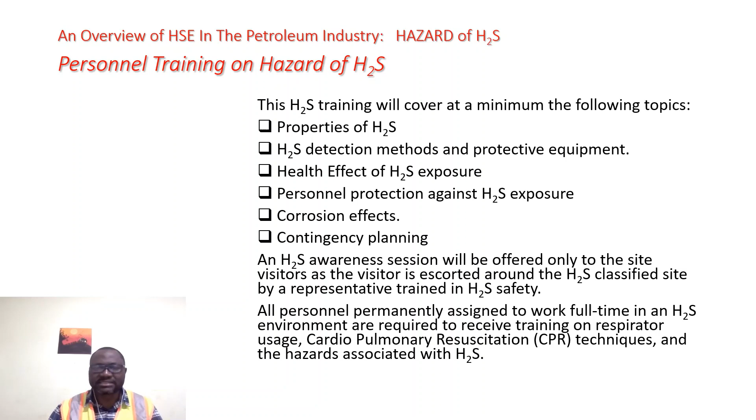Then corrosion effects. And finally, I will talk about the contingency planning and how to rescue somebody that is knocked down by H₂S. That is where I'll be talking about first aid and possibly CPR and things like that. Please come along with me.

So the first thing I will be talking about is HSE management system. What is HSE? HSE is an acronym for Health, Safety and Environment. So when we say HSE management system, it's a comprehensive framework that is used by organizations in preventing, mitigating and eliminating disruptions and losses caused by workplace accidents, risk and hazard exposures, and environmental phenomena.

Further to this, an HSE management system is also key to monitoring an organization's compliance with relevant laws and standards. Okay, there are three keywords in what I just said which will shed more light and bring better understanding to what we are talking about regarding the HSE management system. The first one is accidents. The second one is risk, and the last but not the least is hazard.

So I will explain in detail what these keywords mean, and this will give better understanding to what we are driving at when we say HSE management system. Okay, there is another keyword, we call it near miss. I will explain that one also briefly. So please come along with me.

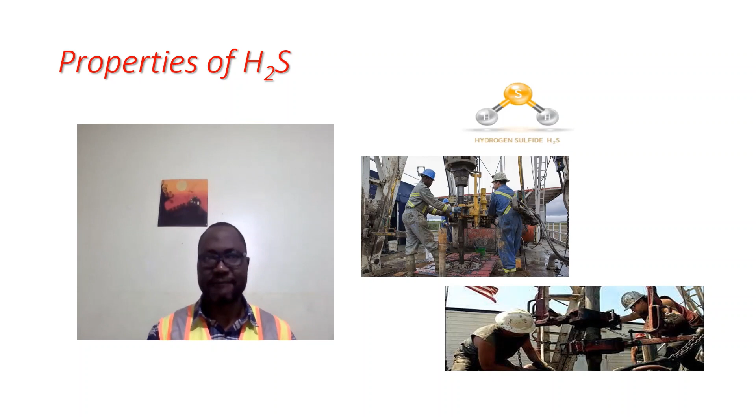Concentration of H₂S will be different at different locations. The toxic effects of a particular H₂S concentration may yield variable responses depending on the duration of exposure, level of concentration, the physical condition of the subject, and the frequency of exposure. So this that I just said in summary signifies the importance of the properties of H₂S. Like I said, in low concentration, it has a characteristic odor of rotten eggs.

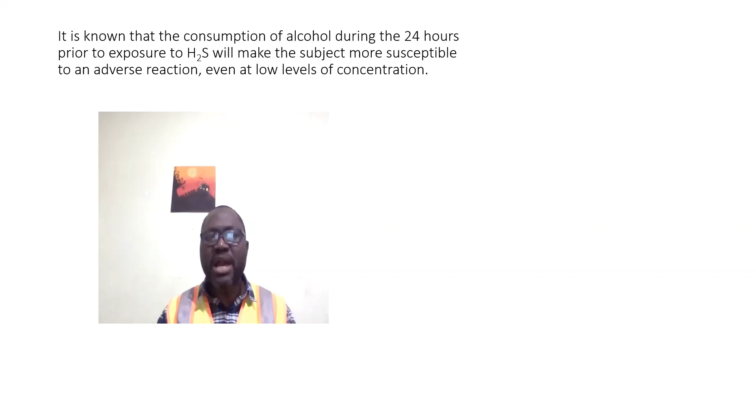In concentrations over 100 ppm, that is 100 parts per million, the human sense of smell is quickly paralyzed. So you cannot smell the H₂S again when the concentration becomes above 100 ppm. Therefore, the sense of smell cannot be relied upon to detect H₂S, and the wearing or availability of respiratory protection is extremely important.

So at this concentration, it is very, very mandatory that any personnel that is going to work in an H₂S detected area must wear respiratory protection.

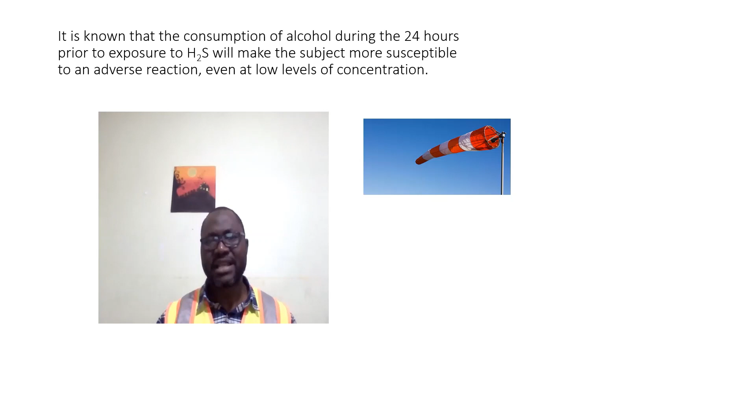So H₂S, because it is heavier than air, tends to go down. It can also be found in low-lying areas. So that is why whenever H₂S is released or there is an alarm that there is H₂S released somewhere, the personnel are required to go upwind. I'm going to talk about the wind socks to detect the direction of the wind. So once you know the direction of the wind and there's a release of H₂S, then you go upwind.

Since we've got to know through the properties of H₂S that it is colorless, it is odorless, and it is heavier than air, how do we now detect if there is H₂S? So what are the detection methods? We cannot detect by sense of smell, it's not reliable. Although at low concentration, you can smell the distinctive rotten egg smell. But when the concentration goes above 100 ppm, as I mentioned earlier on, the sense of smell is deadened, paralyzed. The olfactory lobe is affected, you cannot smell again.

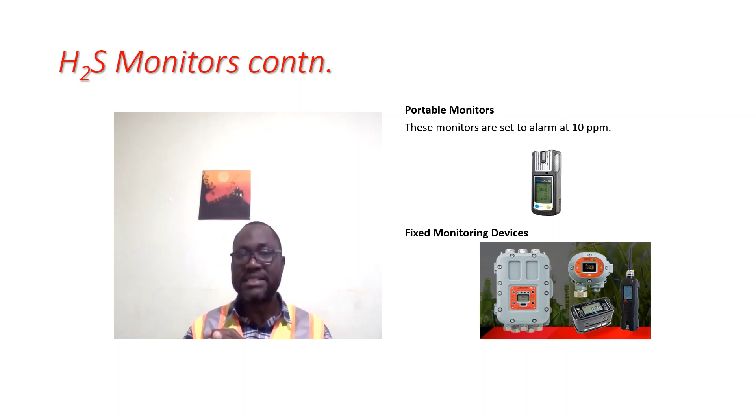So shipping or storage areas should also be considered as release points as well. So you have to put these fixed monitoring devices. You have to install them in all those areas, like where processed gas can be released from a number of different valves, weld joints, seals, flanges, or gaskets.

I've participated in one project before in the Kuwait National Petroleum Corporation, whereby we fixed this type of monitors. And when we were fixing the fixed monitors, we also had our own mobile or portable monitors that are fixed to our breathing zones.

The next thing I will be talking about is the health effects of H₂S. Under the health effects of H₂S, I'll be telling you the concentration in relation to the exposure time and the health effect. So let me start with 0.1 to 10 ppm. When you have 0.1 to 10 ppm of H₂S being released, instantly you will be able to detect the distinct rotten egg odor. The maximum continuous exposure time for 10 ppm is 8 hours. So that is the threshold limit value of H₂S. That is very important to note.

Now, if you have between 100 and 200 ppm, this is divided into two parts. The first part, the exposure time from 2 minutes to 15 minutes. In that period, there will be loss of sense of smell. The olfactory lobe will be attacked and you will not be able to smell anything again. That is why we say that sense of smell is not a good detector of H₂S. You cannot rely on your sense of smell, because if the release continues and you did not go away from that area, that same H₂S is going to attack your olfactory lobe and you will lose your sense of smell. And once you lose it, you might be deceived that the gas is no longer there. It is still there. So when you remain there between 8 to 48 hours, the next effect on your health is death. It's as simple as that.

And if you have between 500 and 600 ppm, exposed within 30 to 60 minutes, the first health effect is on the central nervous system. There will be confusion and loss of balance. The person will feel confused and he will be staggering. He will not have stability; there will be loss of balance, in short.

Then, if you have between 600 to 1,500 ppm, let's say a person is exposed to that amount for 2 to 15 minutes. Apart from the central nervous system being affected, apart from confusion and loss of balance, the H₂S odor can no longer be detected. Then if the person continuously stays there for the next 1 hour, the person is going to die. So rapid loss of consciousness, respiratory paralysis, followed by death. That is when you have between 600 to 1,500 parts per million of H₂S.

Now, let's say in a location we have about 2,000 ppm. What is going to happen? Instantly, immediate loss of consciousness. The person will become unconscious immediately. Then there will be rapid failure in breathing. The person will lose his breathing and heart function, followed by death. So this type of situation we call IDLH, immediately dangerous to life and health. Any situation that is going to lead to immediate fatality, that is how we describe it in the field of safety. And that is the reason why we say H₂S is one of the most dangerous gases in the petroleum industry.

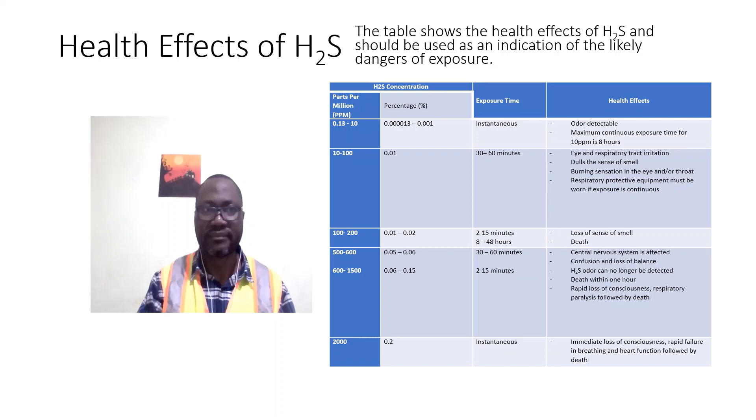After talking about the health effects of exposure to H₂S, next I will be talking about personnel protection against H₂S exposure. So working in an H₂S area, how is the personnel going to be protected against H₂S? The first one is that all workers must receive a site-specific orientation and know what the alarms are and where the evacuation points are located in case of an emergency. So there should be a contingency plan before anybody can work in an area that is suspected to get a release of H₂S.

Secondly, all non-routine work must have a work permit and a pre-job discussion that identifies the risk of H₂S. What do we mean by this? There is something we call the work permit system, whereby before you can work in an area in oil and gas, maybe in the petroleum industry, maybe in a refinery, you must first of all get a work permit. We have different types of work permits. You have cold, hot, confined space, like that. So you must get the appropriate work permit before you can work.

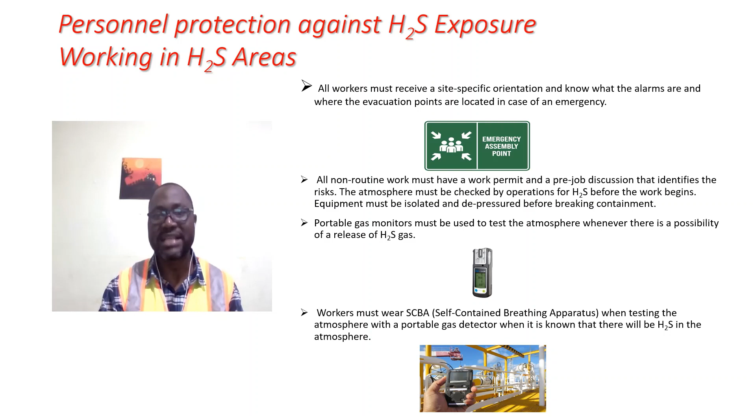The SCBA, I'm still going to talk about it in detail, but the SCBA means the self-contained breathing apparatus. So they have to wear that when testing the atmosphere with a portable gas detector when it is known that there will be H₂S in the atmosphere. And when working in a confined space that contains H₂S, there must always be one more SCBA available than the crew members. So, for example, if you have a 3-man crew, then you will require 4 SCBA.

Then workers must know where to locate the wind socks. The wind sock is what is installed in the area to detect the direction of the wind. Through the wind socks, you can know the direction of the wind. So in case of a release of H₂S, the personnel must move upwind. In the case of an unplanned release of H₂S, the personnel must move upwind. And how would they know? By the wind socks. Some people use sand. They will carry the sand and drop it like that so that they will know the direction.

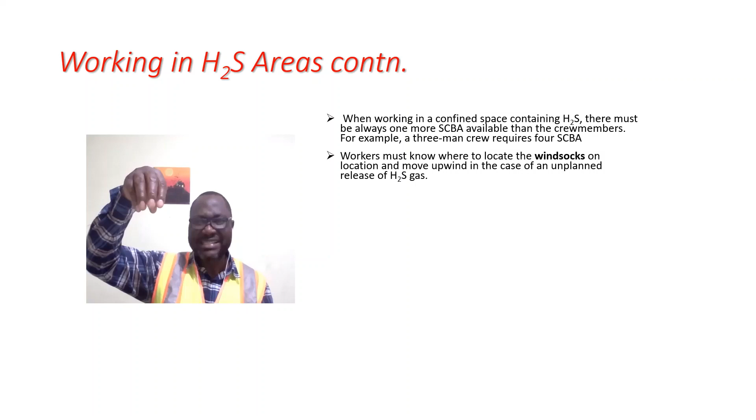But that one is not all that reliable, because suppose the wind is not blowing strongly enough at that moment to blow the sand, but the wind socks can always show you the direction of the wind. So in case of an emergency release, you have to know that you have to move upwind. All operators working in an H₂S area should wear a personal H₂S monitor. Apart from the fixed ones, you must carry your own personal H₂S monitor anytime you are working in an area where there is a likelihood of release of H₂S.

If there is an unplanned release of H₂S into the atmosphere, all workers in the area must do what? They must evacuate without delay. They must evacuate immediately. And when they evacuate, they will go to the evacuation point, or what we call the assembly point. Communication must be made to the control room to sound the alarm. The supervisor of the team must immediately call the control room, then they will sound the alarm so that everybody in that area will move to the evacuation point. And before that time, there must have been drills about how to escape when there is an emergency or unexpected release of H₂S.

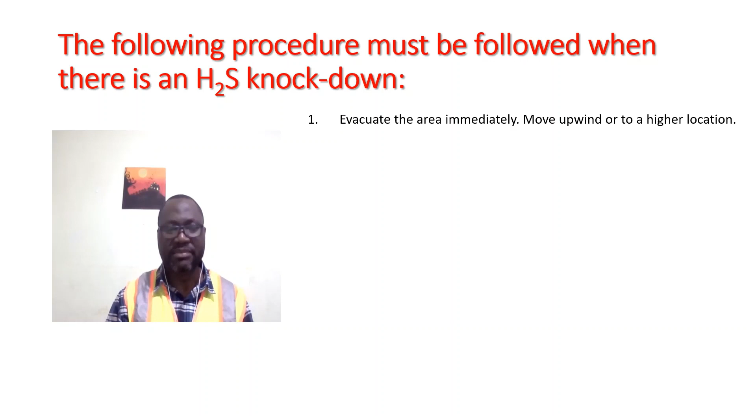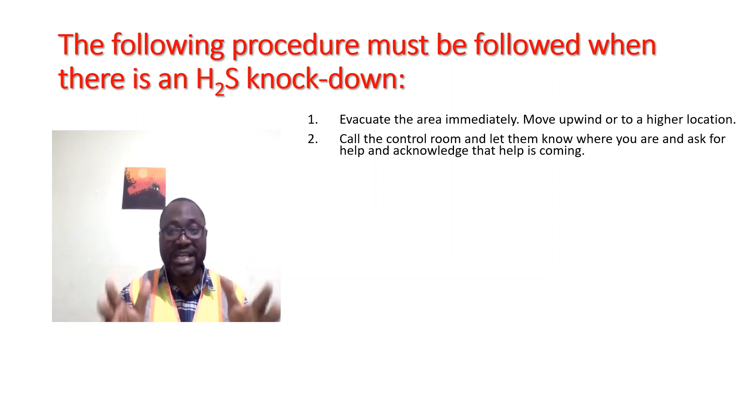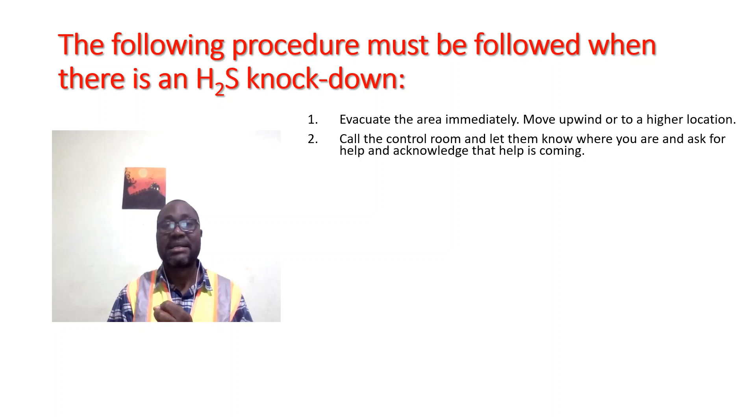The second thing is to call the control room. During the training, everybody that will be working in an area likely to get an H₂S release must have received the training and must have been given the number of the control room to be called, especially the supervisor in charge, and let them know where you are. So you call the control room to inform them of the situation.

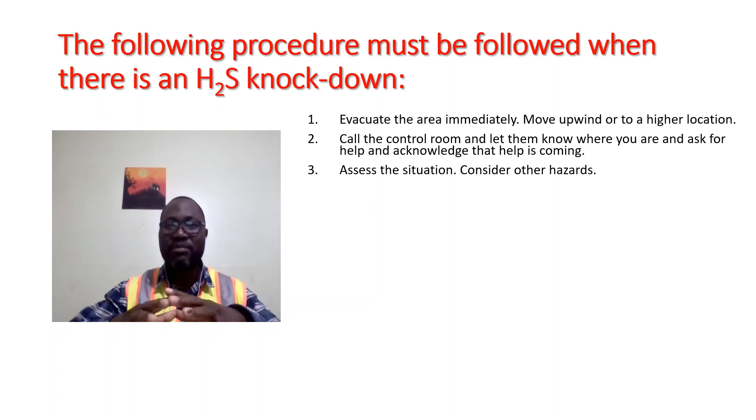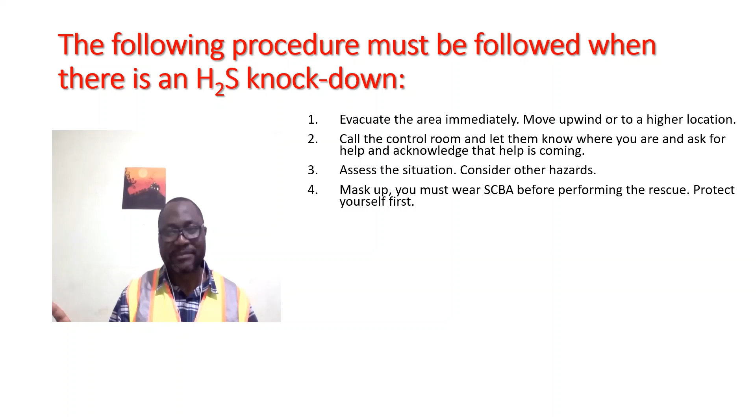Then you have to assess the situation and consider other hazards. Mask up. You must wear the SCBA before performing the rescue. The rescue team will come, so protect yourself first. If you are not trained as a rescuer, if you don't know anything about how to rescue, don't try it. Don't be moved by emotion. Maybe the person that was knocked down is your friend, your brother or your family. Don't try, except if you have been trained as a rescuer and you have a spare SCBA apart from the one you are wearing yourself.

Then you can remove the victim to a safe area, upwind, and with enough room to perform CPR. After moving the victim to the safe area, if the victim is unconscious, you begin artificial respiration on the victim. That is the CPR. Then report and ensure the victim is transported to a medical facility. After you have performed the CPR and the person has regained consciousness, move such person immediately to a medical facility for further medical attention.

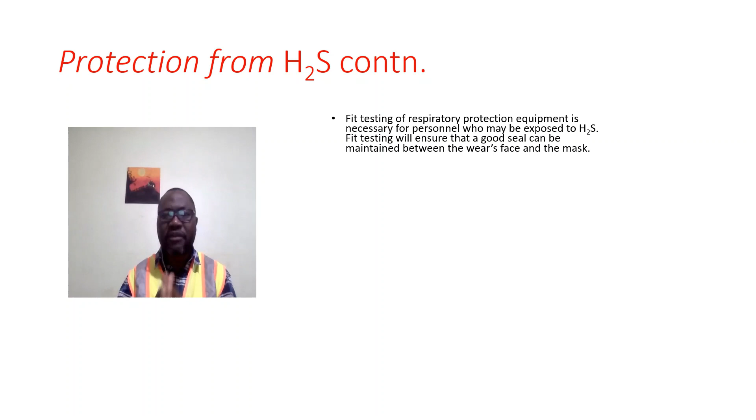Any work area where H₂S may be present must be approached from upwind, if possible. There is emphasis on upwind. I have talked about wind socks. Wind socks are very important to determine the direction of the wind, and once the wind direction is detected, you must always approach the work area from upwind. Why? That is why we talked about the properties of H₂S: because H₂S is heavier than air.

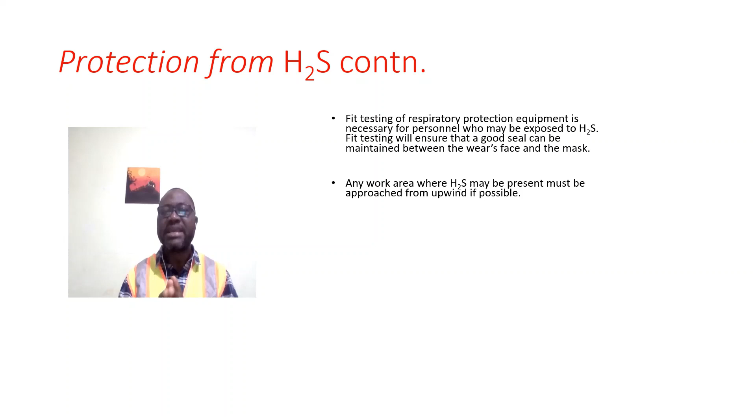When working in a potentially hazardous H₂S environment, there should ideally be quick and easy access to protective equipment. A mask or breathing apparatus should not be more than one breath away and must be stored upwind of the work. When you realize there is a release of H₂S, you must move upwind. There is emphasis on upwind and the availability of breathing apparatus because H₂S is very, very dangerous.

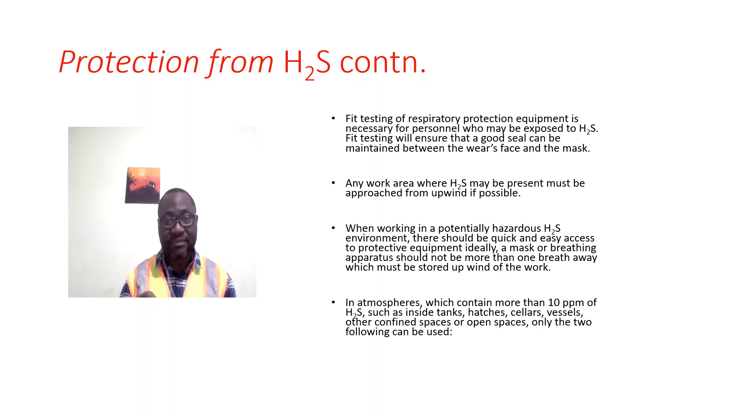Now, in atmospheres which contain more than 10 ppm of H₂S, such as inside tanks, hatches, cellars, vessels and other confined spaces or open space, only the following two can be used.

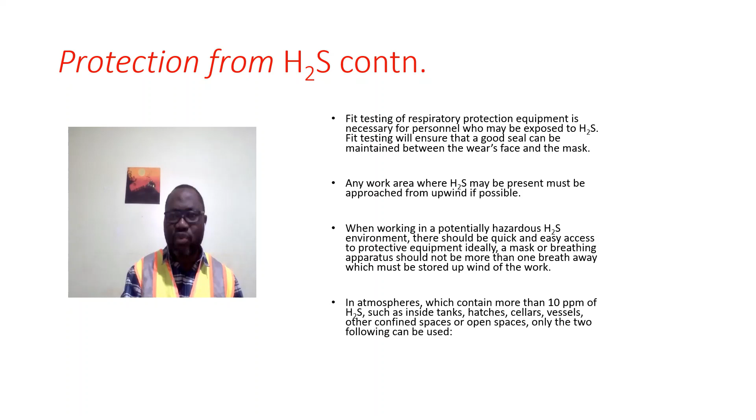I will mention them now. I've mentioned them before, but I want to lay emphasis on the two respiratory equipment. The first among the respiratory protective equipment is self-contained breathing apparatus, SCBA. This is most suitable where more freedom of movement is required, but the time of use is limited to only 15 to 30 minutes. It is better to choose an SCBA of positive pressure.

So the positive pressure will enable the face mask to be tight fit, and it will not take air from outside, but it will only be like releasing air to the outside. So it will be fitted, it will not take air from outside. That is what is meant by positive pressure type, to prevent ingress of contaminated atmosphere at the face seal. And you remember, no beard.

Okay? These have a reservoir of breathing air in a cylinder carried on the back, which under normal use should supply 30 minutes of air. These have an NPF of 2000. So may be used in an atmosphere of up to 10,000 ppm hydrogen sulfide in here.

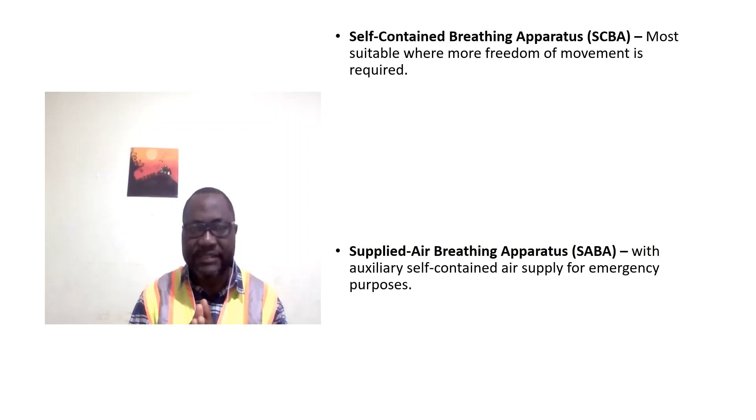Okay? The second type is the supplied air breathing apparatus, SABA, with auxiliary self-contained air supply for emergency purposes. These systems consist of large air tanks with working mask and a small independent air cylinder as backup for self-rescue. Okay, that is the difference between the self-contained breathing apparatus and the supplied air breathing apparatus.

For the self-contained breathing apparatus, there is a limit time that you can use it. Some are 15 minutes, some 20, some 30. Most of the time, maximum 30 minutes. But for the supplied air breathing apparatus, you can use it for longer time. They can be stored on a wheeled cart and moved to where they will be needed. So they have an NPF of 2000. They should be of a positive pressure type also. This is very, very important.

Another thing of note is that you should not use escape mask. Under no circumstances should you use escape masks like gas mask devices for working where H₂S can be released, because there is no cylinder carrying any air that will supply air to you. So when you are using a gas mask, you will still be breathing the environment air. So that is dangerous. Don't use it.

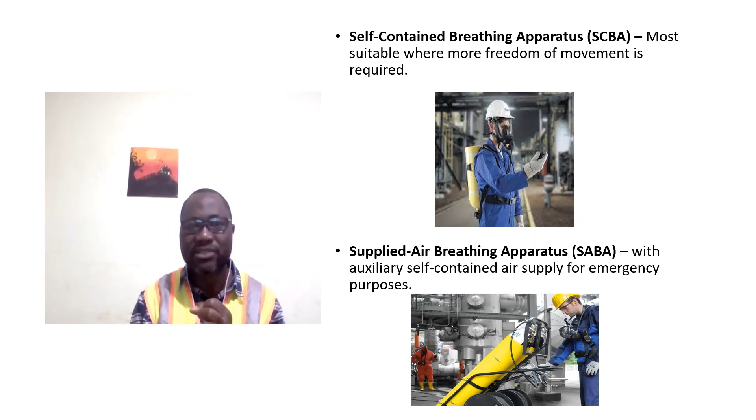SABA. Another very important thing which I consider paramount to talk about is the cleaning and maintenance of the breathing apparatus, I mean the respiratory protective equipment. Okay, all breathing air equipment should have monthly inspections. This inspection shall include: one, you have to check the pressure of the cylinder. It should read full.

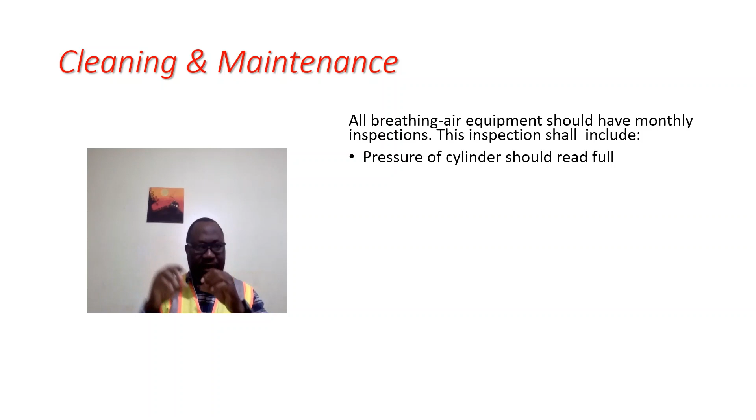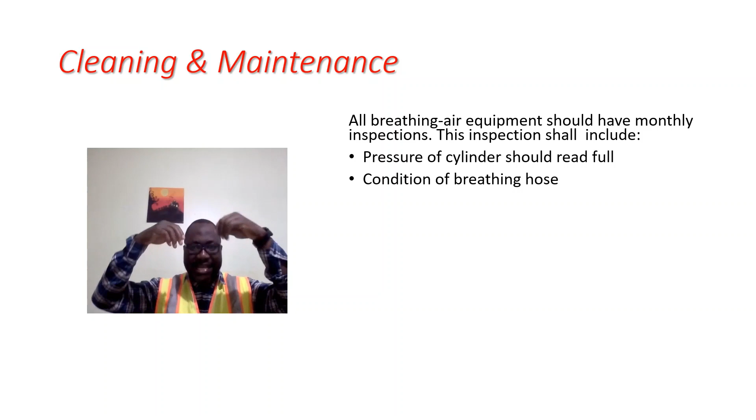Then condition of breathing hose. The breathing hose, you have to check it. There is a hose that is attached to the mask and the cylinder. So you have to check the condition, that it is not cut, it's not leaking. Then the condition of the mask itself. The straps fully extended. So the strap that you are going to make tight must be fully extended. Mask protected in a plastic bag.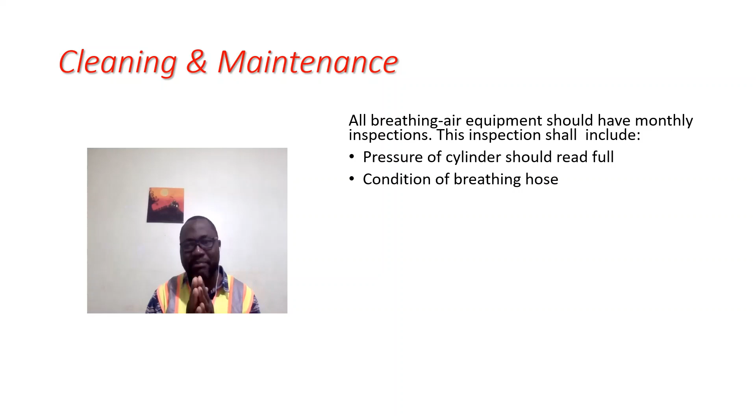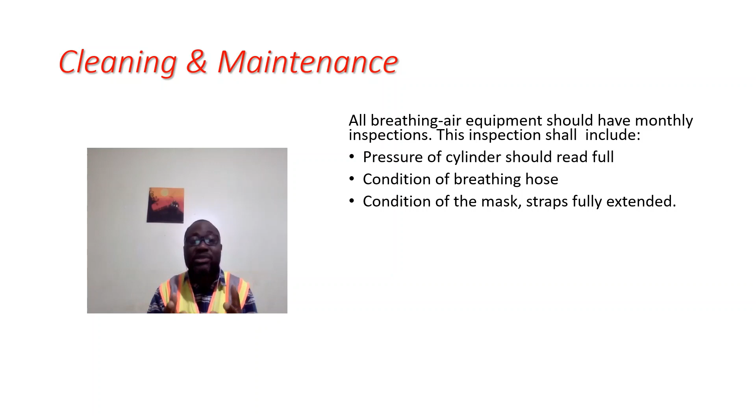So you must always keep that mask in a plastic bag to prevent accumulation of dust or anything like that. Then you have to ensure all parts are clean and in good condition. You have to check it properly. This is an equipment that is going to save your life at the work site. So it is mandatory on you to take adequate care of such equipment.

Such equipment is precious. You have to take care of them, okay? So immediately after use, the SCBA shall be cleaned and stored. All parts shall be wiped down and left clean. The face piece must be sanitized with a commercial disinfectant that is approved for use by the respirator manufacturer. So don't just use any kind of cleaner or sanitizer. Use the one that is approved by the manufacturer of that breathing air equipment. That is very, very important.

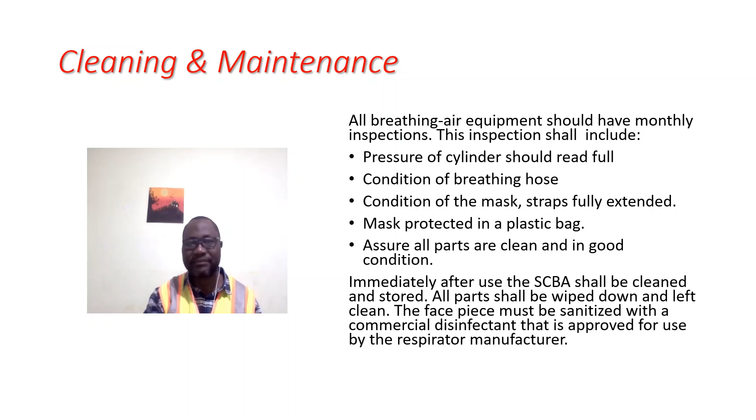Now, let me quickly talk about the corrosion effect. Hydrogen sulfide, H₂S, when it reacts with iron or steel, will form iron sulfide, which in turn reacts with air to form iron oxide. Okay, so iron sulfide is pyrophoric iron. So the latter exothermic reaction can generate sufficient heat to ignite flammable vapors.

Okay, why are we concerned? We are concerned because of the likely reaction of the iron sulfide, which can generate sufficient heat and ignite flammable vapors. So where iron sulfide, which is pyrophoric iron, is present or suspected to be present, what do we do? The entire surface should be kept wet with water during handling. Then the exposure to air should be minimized until the iron sulfide is buried or exposed in a controlled environment to allow the reaction to occur.

So this is just for mentioning, but it is very important because fire is also a serious hazard, which we have to mitigate against. That is why I mentioned it.

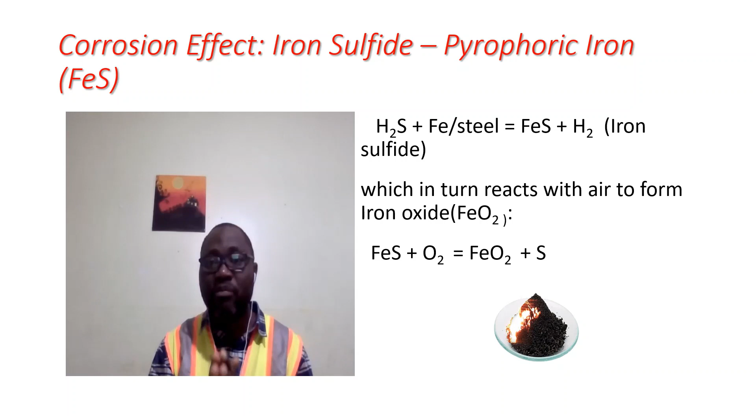So far I've been able to talk about the overview of HSE in the petroleum industry, and the second part of the topic I am treating, the hazard of H₂S in the petroleum industry. So far I've talked about the properties of H₂S, H₂S detection methods and protective equipment, the health effects of H₂S exposure, then personnel protection against H₂S exposure. This I talked about extensively, and I talked briefly about the corrosion effect.

But equally important is the last thing I want to talk about now, which is first aid. Because although our aim is to protect people, to make people safe, in case you do the training, you do the detection, you do everything, and something still happens, there must still be something to do, and that is first aid. So it is very, very important.

So if eyes become irritated while working in a plant or an area that has been determined to be safe from H₂S, the following precautions should be taken immediately. One, you have to leave the area at once and move upwind. Okay, so the installation of windsocks is very, very important. Anywhere you think there might be a release of H₂S, you have to install windsocks. These windsocks will help you to know the direction of the wind, and enable you to know how to move upwind in case of H₂S release.

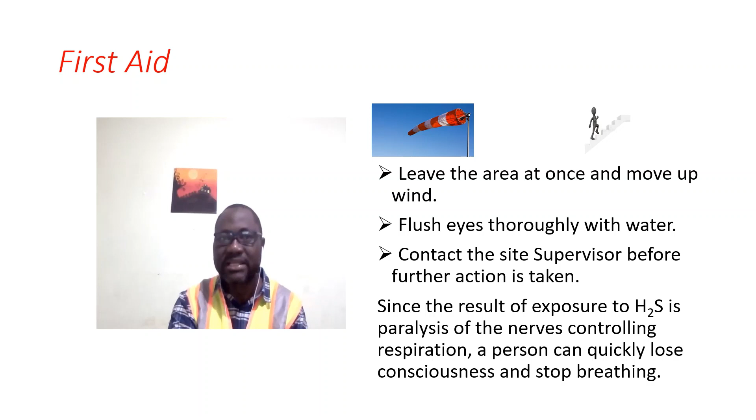Since the result of exposure to H₂S is paralysis of the nerves controlling respiration, a person can quickly lose consciousness and stop breathing. So H₂S is very, very fatal. It is very, very dangerous. So we have to be extremely careful and conscious of what we are doing in an H₂S suspected area. If the victim is promptly moved to a safe area and artificial respiration is started immediately, the chances of complete recovery are good. Delay in the use of artificial respiration will reduce the chances of recovery.

However, it must be continued until normal breathing is resumed, until a medical professional can assume full responsibility for the patient, or the rescuer is physically unable to continue. If the rescuer is physically unable to continue, he must leave, because your own safety comes first. Any person overcome by hydrogen sulfide must be treated for shock by keeping the body warm while artificial respiration is being applied, and keeping the patient calm until they can be diagnosed and released by medical personnel.

So we are now coming to the end of the safety talk with Adiat today. I hope you have learned one thing or the other.